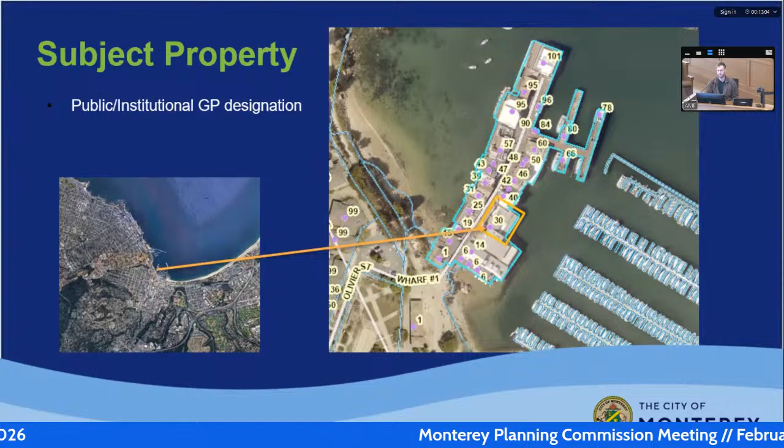So the site at 30 Wharf is a 2-story commercial restaurant structure. It was previously occupied by a restaurant called Scales. Scales has been closed for many years now; its closure preceded the 2020 pandemic, and it has been vacant since. The building itself has about 17,500 square feet, mainly allocated at the first floor at about 11,800, and the second floor at about 5,700 square feet. There's also a 2,000 square foot second level deck at the rear.

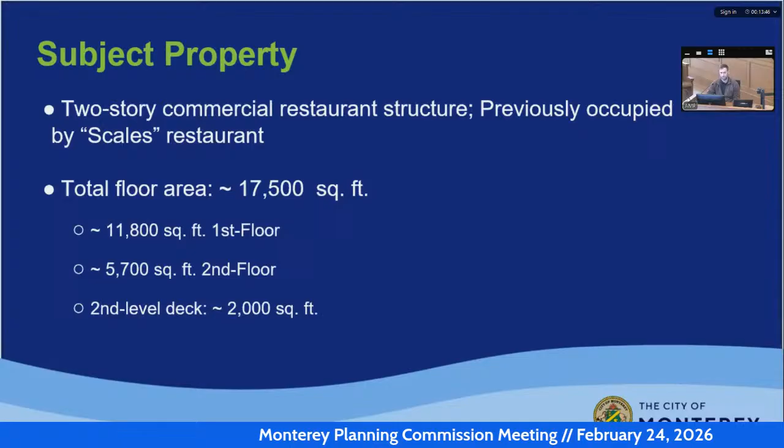So the project involves tenant improvements and modifications, which include a full interior renovation of both floors as well as the deck, new storefront glazing and doors along the wharf frontage, the central walkway, replacement roofing, new rooftop mechanical systems and screening, replacement of an existing interior stair, a new elevator, seismic upgrades, and various new paint and other exterior changes. The project does not involve any expansion of the building's floor area, although there are some increases in height associated with those new rooftop mechanical systems and screens.

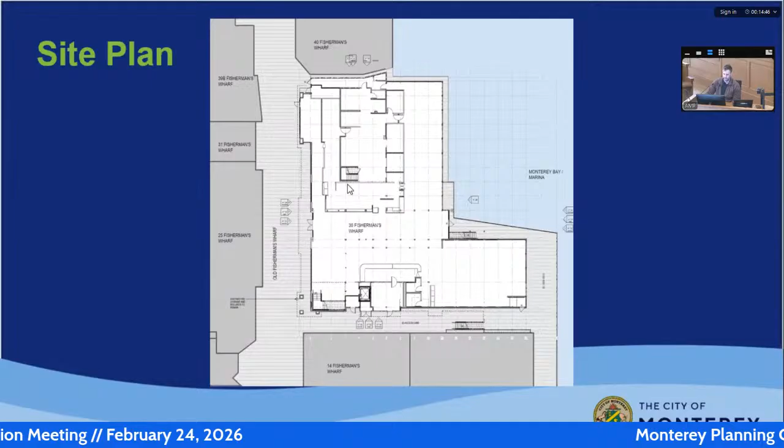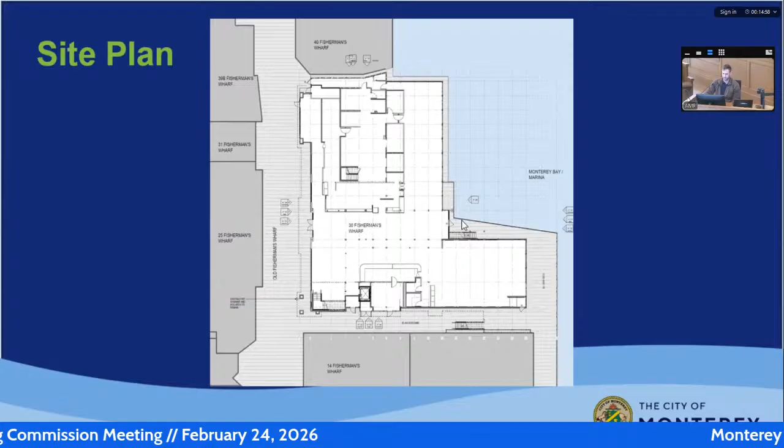So here we see a site plan of 30 Fisherman's Wharf. Just to highlight, this is basically the wharf level. And there is existing coastal access that goes adjacent to the building underneath the second story deck, which is along this access corridor here.

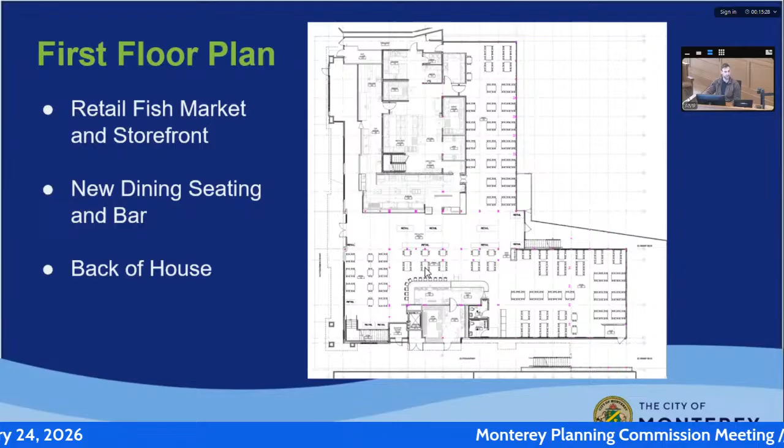Looking at the first floor plan showing these improvements that are proposed today, we're seeing improvements for the retail fish market and storefront, which are going to occur on this upper side of the plan. New dining, seating, and bars, which you can see throughout the floor and the bar here, as well as back of house improvements.

And then at the second floor, again, more dining. And then you can see that outdoor seating area that I mentioned here.

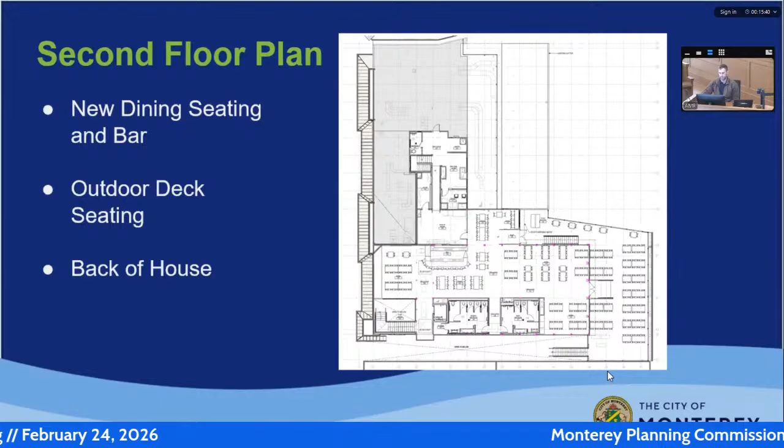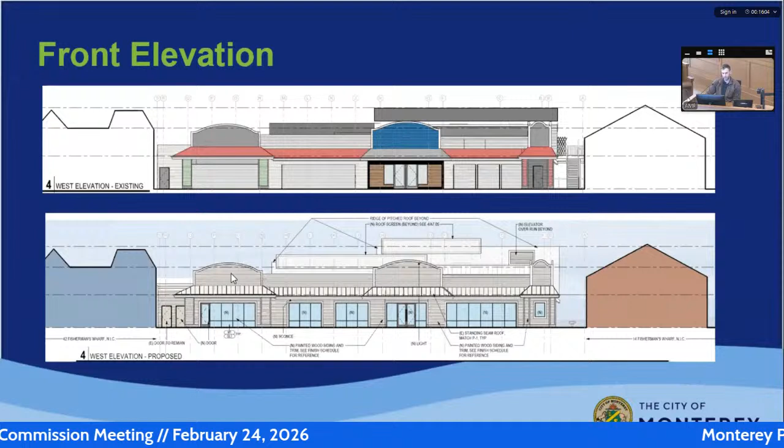So moving on to the elevations, to start the front elevation, this is what would be visible from the walkway of the wharf. I've just highlighted here the main improvements, as I mentioned, these new storefront windows and doors. There would be a new paint scheme, kind of an off-white and white scheme that would contrast with the proposed black storefront glazing. And then you can see the new screens and other appurtenances, including the elevator overrun.

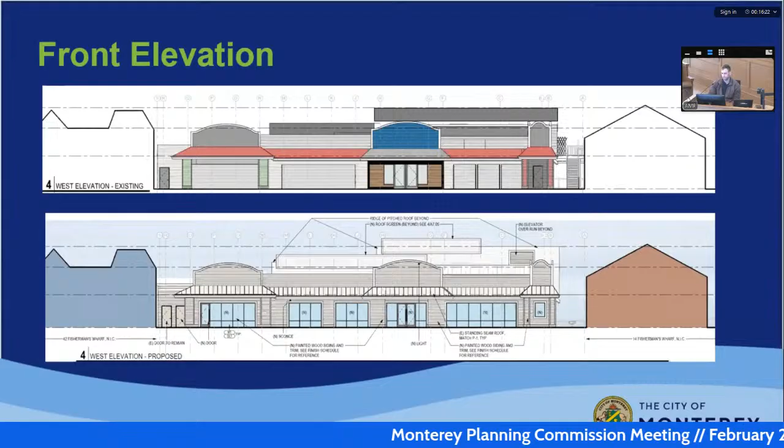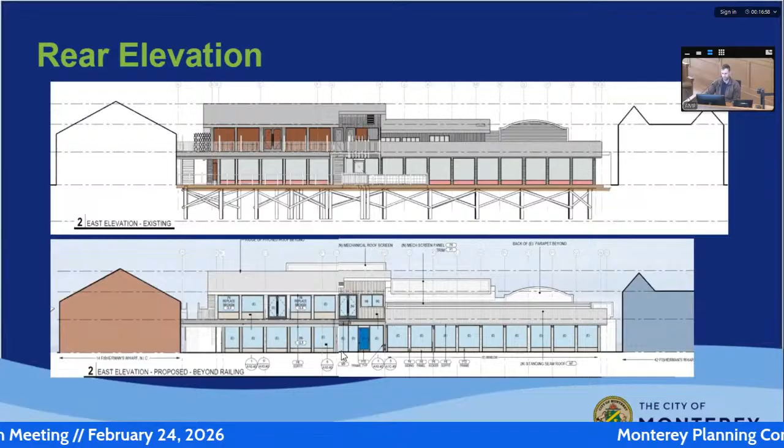And then on the rear, this is the side that faces the marina, and the layer of the deck railing has been removed, so you can see a lot of the improvements to the facade of the building. This is a graphic that is in the staff report, although I just took the elevations - there were two separate elevations showing two different planes of the building that I kind of mashed together to show all of the improvements, so if you see some errors, that's my doing. The architect did put together separate elevations to show those improvements.

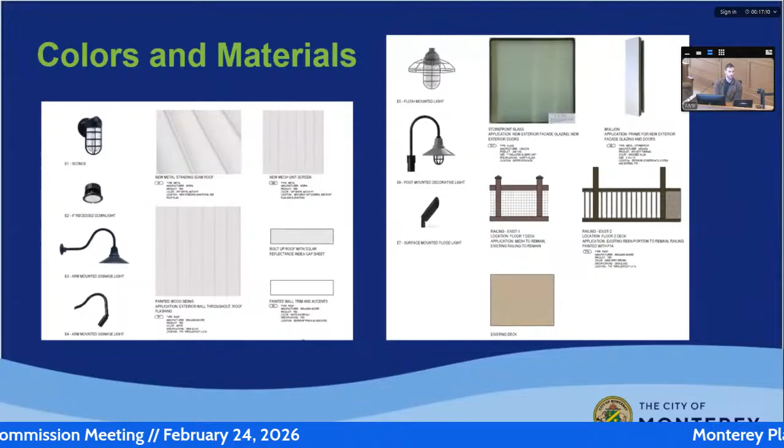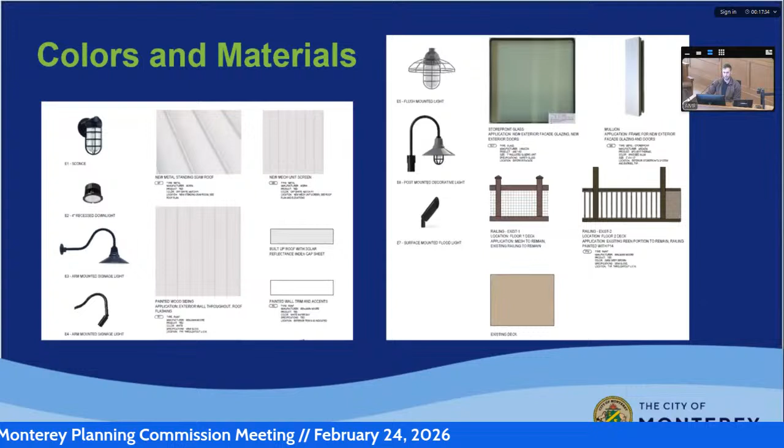Moving on to colors and materials. So we see an array of different light fixtures, many of which have this maritime look to them with these metal guards around the bulbs themselves. And then we're seeing lots of different materials, such as new standing seam metal roofing. The siding would be painted in this off-white color with white trim. The new mechanical unit screening, although not wood, would be metal to match the existing wood siding, and any new siding that would be constructed to replace holes or new siding. And then these are the details on the new decking railings as well.

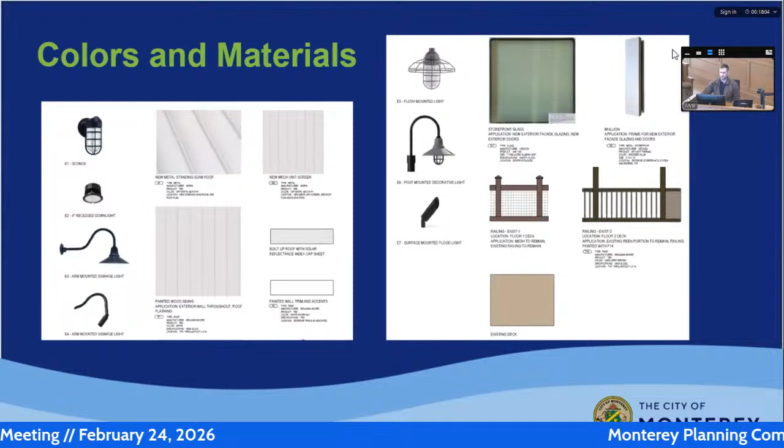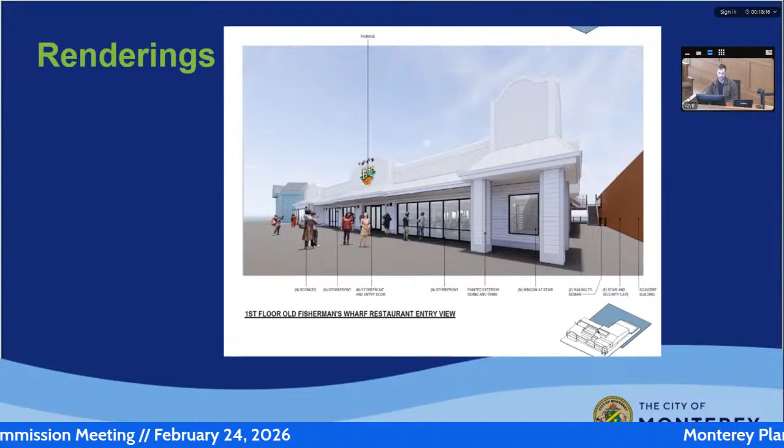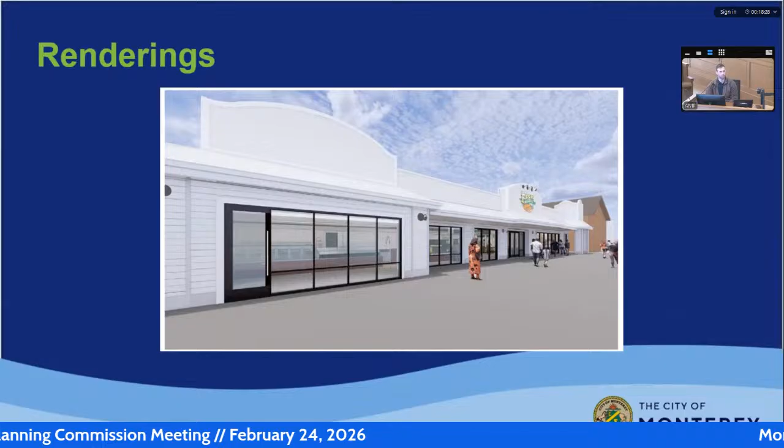So I do have a couple of renderings that the architect put together. Again, this is the view from the main wharf walkway, and the opposite angle down the wharf. You can see through the glass here, this is where that new storefront would be, where they would have an open fish market that you could, if you weren't there to dine, go and buy your fish and take it home.

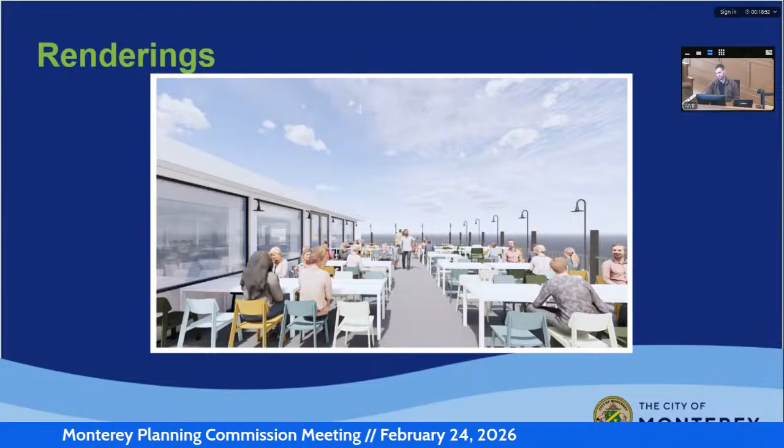So in order to approve the project, the Planning Commission has to make 4 architectural review findings. Staff was able to make these findings, but I will go through them. The first is that the proposed siting, form, mass, and architectural style are appropriate for the site, the surrounding area, and the city. Staff made this finding: it retains the established 2-story scale with some minimal height increases to screen mechanical equipment. As mentioned, there's no expansion of the footprint of the building, and it would modernize the building, both exterior and interior, while preserving the character, that kind of industrial waterfront feel.

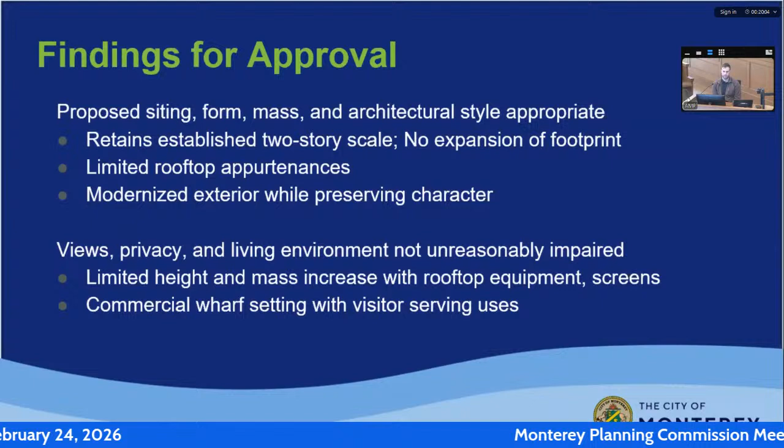The second finding is that the views, privacy, and living environment are not unreasonably impaired. Again, limited height increases, and the commercial wharf setting would remain the same, particularly for visitor-serving uses.

The third finding is that the project is consistent with city plans and design guidelines. I touched on the general plan designation as this is a public visitor serving site. This site is also subject to the Monterey Harbor Coastal Land Use Plan, and staff was able to make this finding that the proposal does maintain that visitor serving use and preserves the existing public access with this plan.

Lastly, the exterior finish, colors, materials, and all exterior features are appropriate. The proposal does include durable waterfront materials. The white color palette works with this site, and with the contrast of the glazing and other doors, it is appropriate. The rooftop equipment is screened, which is required by our code, and I noted the maritime style light fixtures. So with that, staff recommends approval.

The project architect is here as well. I'm available for questions. Thank you, Chris. Any questions for Chris?

I guess I have one question, Chris. This isn't really related to our approval, but does this project increase the seating of the restaurant from existing? There's no existing restaurant there today. I don't know how many seats there were when Scales was originally proposed. It looks like the floor plan was very similar to the Scales layout. It is, yeah, but I don't know how many seats there were before.

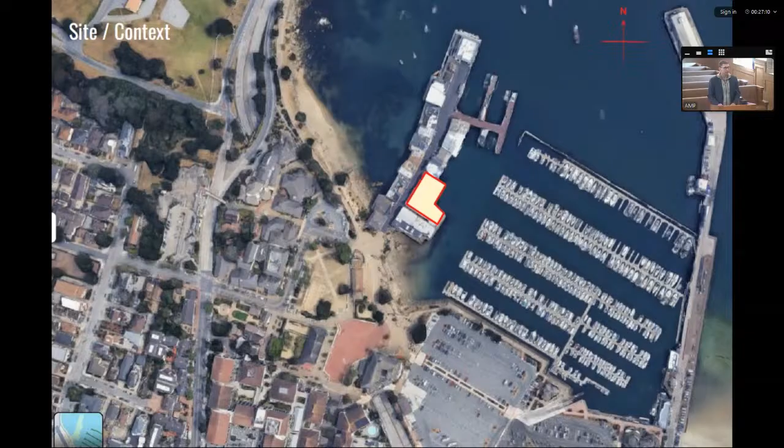Again, looking at the context of the wharf, there's a lot to pull from, and a lot we're excited to be part of. We noted the variety of scale and color palettes and so forth, looking for a way to fit within that but also stand out in our way, creating a place consistent with the San Pedro Fish Market brand. The existing storefront and the adjacent properties of the general store and the Pirates Cove, just for context.

As Chris mentioned, we've been working with staff for some time now to develop our project. We're very excited about this marketplace model for dining, with multiple food destination elements within the restaurant. So they're actually different venues in a sense within the overall building, with different seating areas, breaking down the scale of the venue. In some ways it's very similar to the seating count from the previous plans we've seen from the Scales era project.

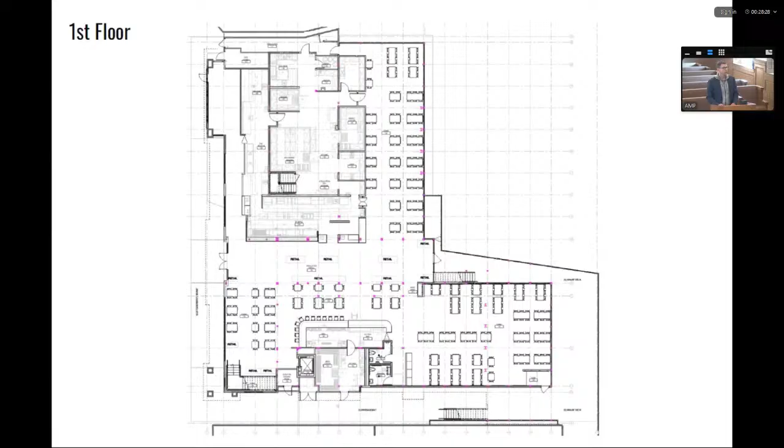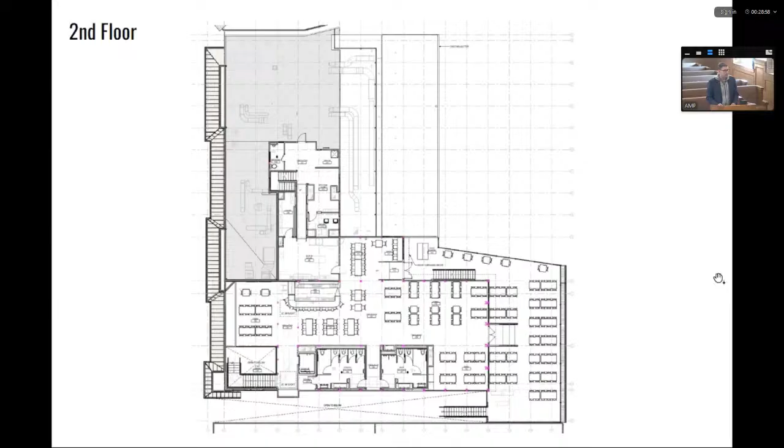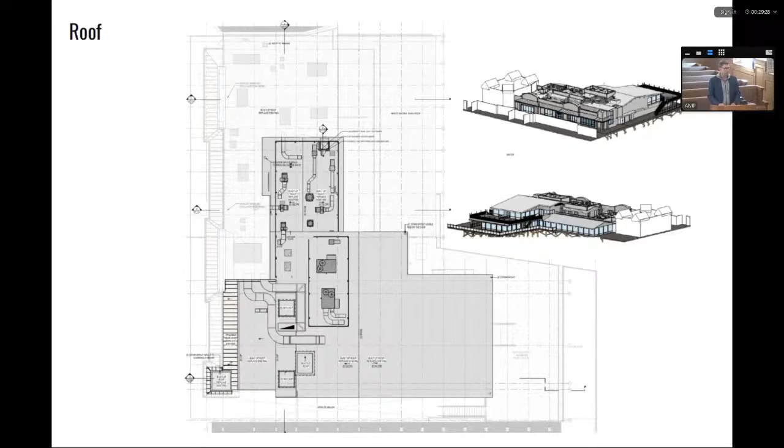Some of the rooftop elements are really what's driving the main architectural modifications, just to bring this building into a contemporary standard and up to code for ventilation and comfort. We've added several new rooftop units, so we've proposed some screening elements to be consistent with the architecture but also stepped in scale. We tried as best we could to pull that back from the edges so it really wasn't visible from the wharf itself.

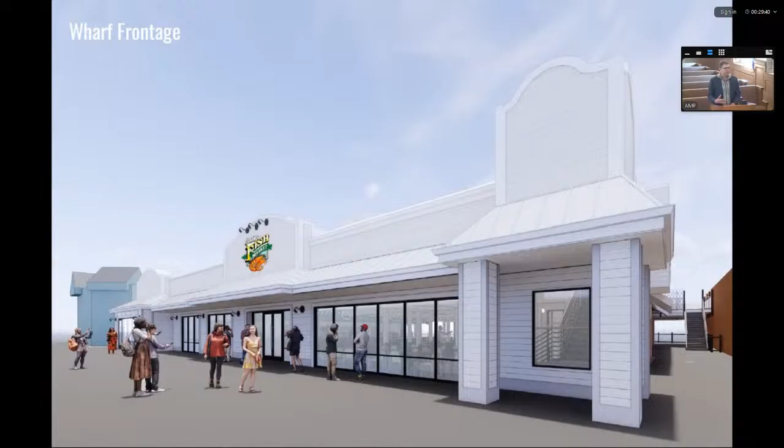This is that new storefront. We think it's a fresh, modern take for the wharf, but still consistent with the vernacular of the wharf and adjacent properties. Obviously the signage isn't part of this application, that'll come down the line. Part of our rationale for this white and light gray palette is that we think the logo will really stand out against it, as well as opportunities for a potential art mural along the public access corridor, which we've yet to develop. We think there's room to create some additional color on the building with a subsequent mural art proposal.

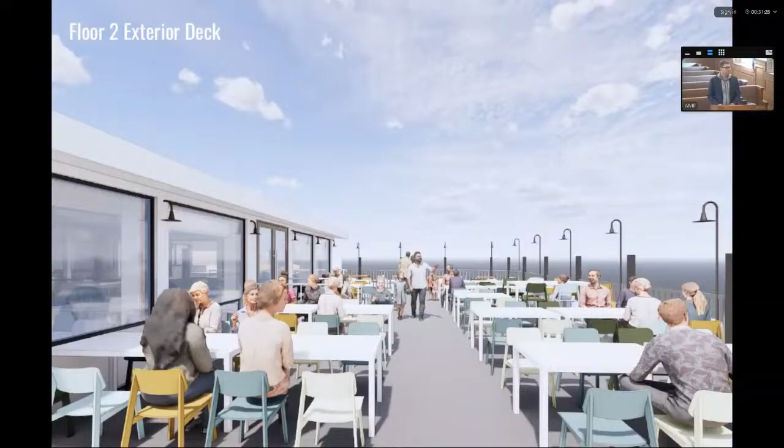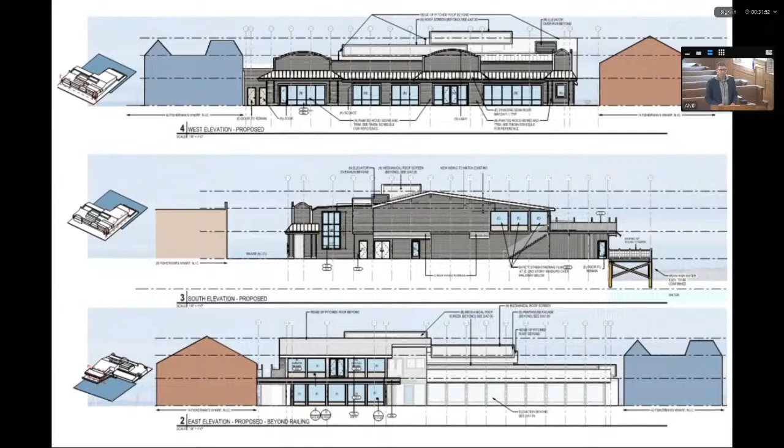Happy to answer any questions. Thank you very much. Questions?

I have a question, and that is, are there going to be any preventive measures taken to preserve all of the exterior metal work, such as the light fixtures, metal railings, and the rooftop equipment, and just all the stuff that's going to be exposed to corrosion?

Well, certainly we're trying to specify a high performance paint coating for all of the exterior elements. I thought you were going to head to the bird question. I figured you probably dealt with that by painting the building white. Yeah, that's a big part of the rationale there.

But we're certainly trying to be cautious about the conditions here and proposing long weathering materiality to minimize overall cost and ongoing maintenance, which we expect there will be some, being in a marine environment. And I would also expect that the owners, with experience going back to 1956 with their original location, would have some input on what works and what doesn't work.

Sure. Yeah, okay, very good. Thank you. No more questions? Okay, that was quick and easy.

Is there anybody in chambers that wishes to speak to this project? Seeing nobody online? There are no attendees online. Thank you, Erica. We'll close the public hearing and take this back to the commission.